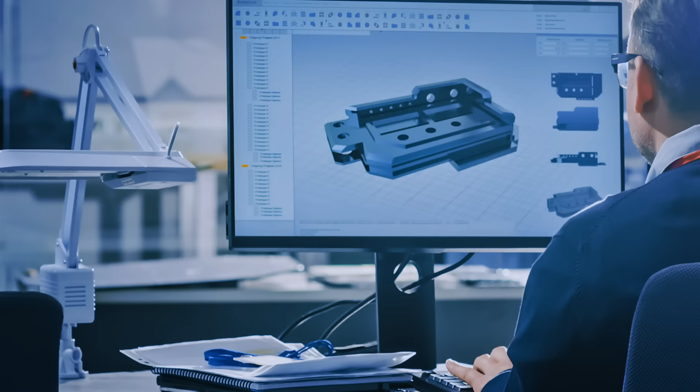The Revit Revision tool helps you track changes to a view and enables you to use cloud-shaped tags to show their location and sequence. This process can also add data to tables in Revit title blocks that are created to show revisions. Revit allows a numeric, alphanumeric, or custom numbering sequence for these revisions.

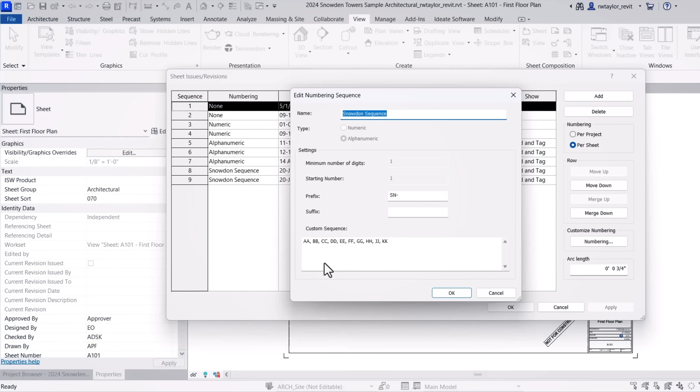I have created a custom sequence named Snowden Sequence for demonstration of this process. I can now create additional revision sequences that will follow the custom sequence that I've previously defined. I'm going to create two new revisions that will be defined as Addendum number 4 and Addendum number 5. I can create these within the Revit interface as shown, but I can also quickly batch create new revisions using Ideate BIMLink to save time.

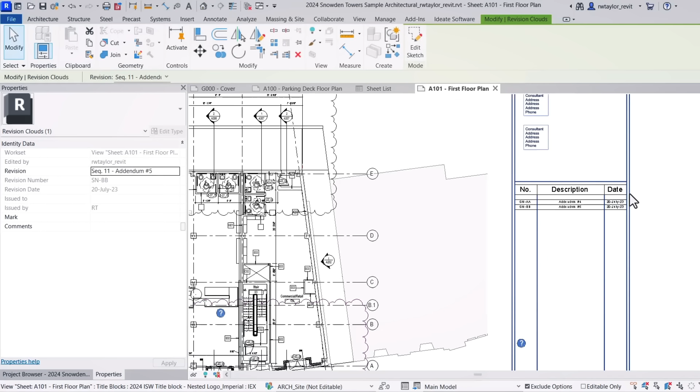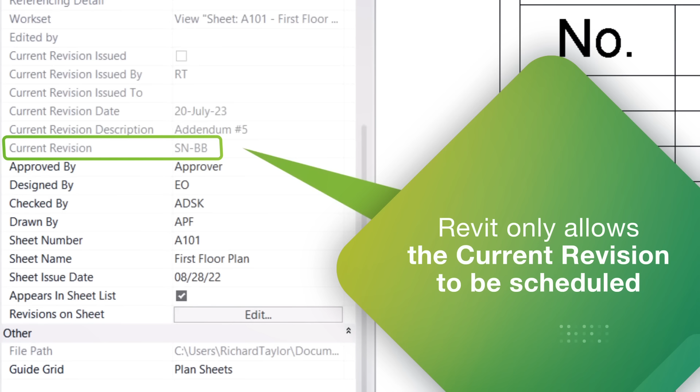I'm going to draw two revision clouds that represent our Addendum number 4 and Addendum number 5. As you can see, these are now automatically populated within the title block to show both revisions. The problem is that Revit only allows you to show a sheet schedule with the most current revision. Since the last revision cloud we assigned to the sheet was Addendum number 5, Revit will only show us the current revision with the properties of the sheet, and this is the only property that can be scheduled in conjunction with that sheet.

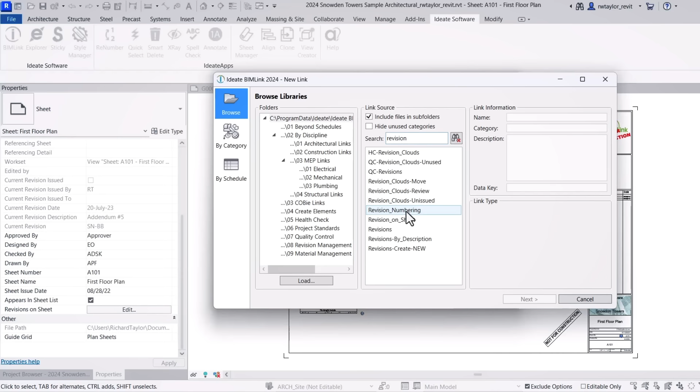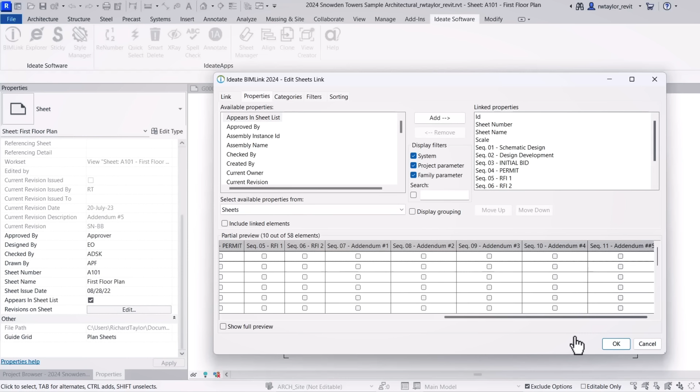First, we are going to review the properties of the revision numbering. Notice it has my custom Snowden sequence that I can easily modify if so desired. Next, we are going to review the actual revision sequence definitions where I can modify description, date, issued by, etc. Finally, and most importantly, we are going to review the actual individual revisions assigned to the Revit sheets. Notice that Ideate BIMLink has created custom properties that align with each revision sequence.

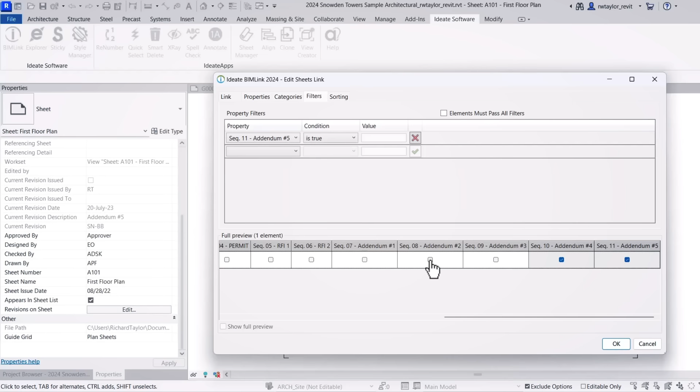To modify information quickly, I might want to filter on only sheets that have Addendum number 5. Once I have that filtered list, Ideate BIMLink allows me to assign additional revisions to the entire sheet without the need to draw a revision cloud. I'm also going to assign Addendum number 1, Addendum number 2, and Addendum number 3 to the first floor plan sheet. When I close Ideate BIMLink, you can see the additional revisions have been added to the title block of the first floor plan sheet.

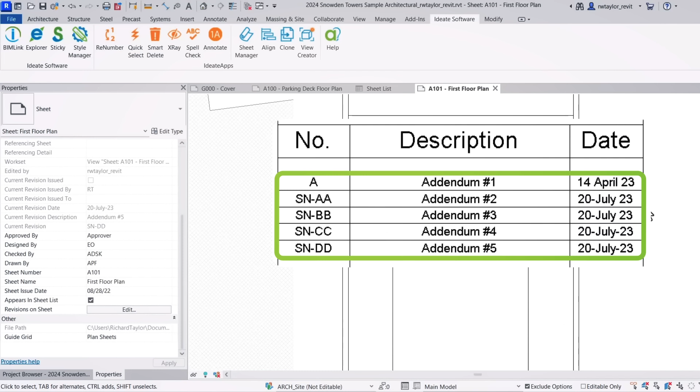I am now going to export the filtered list to our Excel DIR template. I'm going to export the revision numbering, the revisions, and revisions on sheet link definitions to our delivered DIR Excel template. Remember, this is only going to export sheets that have Addendum number 5, which is our most current revision. When I open the Excel file, you can easily see all the revisions that have been assigned to the first floor plan sheet.

Now, let's go back to Ideate BIMLink and remove the filter assigned to filter on only sheets with Addendum number 5. We only need to re-export the revisions on sheet link to update the DIR Excel file with the full information. We haven't made modifications to the revision numbering or the revision sequence link definitions, so we do not need to export those again.

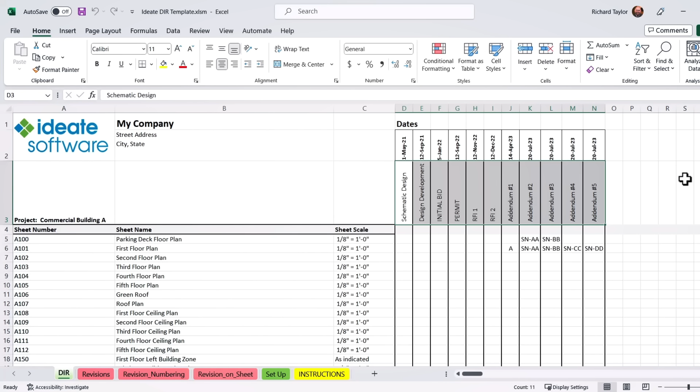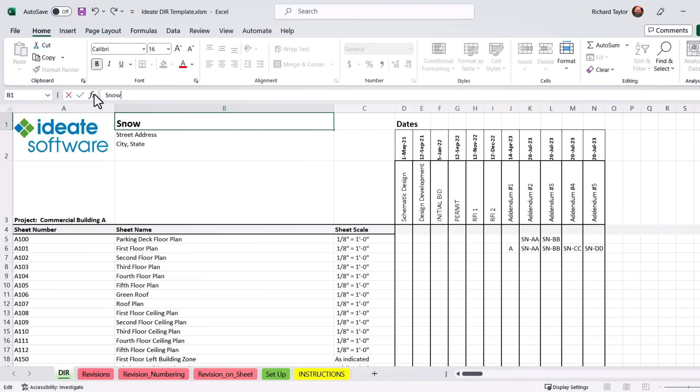Here, you can see the parking deck floor plan also has Addendum number 2 and Addendum number 3 assigned to the sheet. Before I save this Excel file, I might want to make modifications to the project name and location. All the graphics and information is customizable, and there are clear instructions included with the yellow tab of the DIR Excel template as well as the green Setup tab.

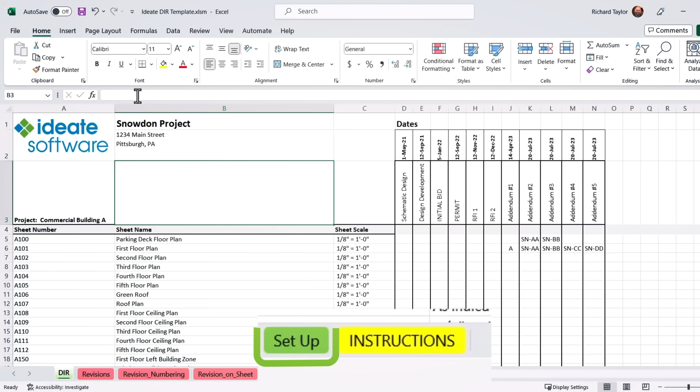How do we display this matrix of sheets and revisions back in Revit? Well, Ideate Sticky to the rescue. Let's first create a new sheet that will contain the revision information. We will use Ideate Sticky to display the DIR tab within the Excel template. I might want to modify the name of the schedule to better reflect the purpose of this revision schedule. I can easily display all the Revit sheets with all the assigned revisions for each sheet using this workflow with Ideate BIMLink and Ideate Sticky.